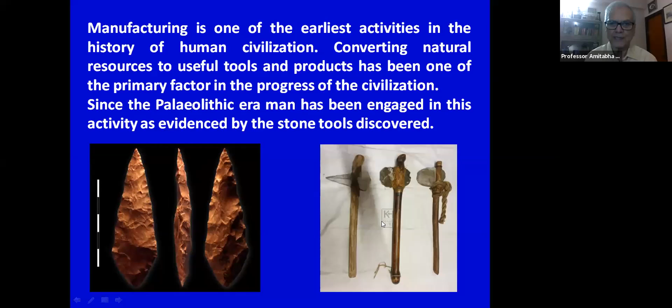Like this. Now, this is a point which I have mentioned briefly, but I should mention in a more elaborate way, that manufacturing is the driving force behind the world economy. You know that long back, 300 or 400 years back, everybody in Europe used to think of coming to India. Now every Indian boy is thinking of going to USA and Europe. Now, this is something which changed.

Why it changed? Because something happened through which, in manufacturing, the West took a lead and we fell behind. Manufacturing is closely linked to the growth of world economy. And the following slides show the two major changes in the world economy in the history of civilization.

Now, such events which trigger a change in shape of the economy growth rate are termed as industrial revolution. And two such major revolutions have been recorded. The first industrial revolution happened with the advent of the first prime movers like steam engine. And the second industrial revolution happened with the emergence of microelectronics and the computer technology.

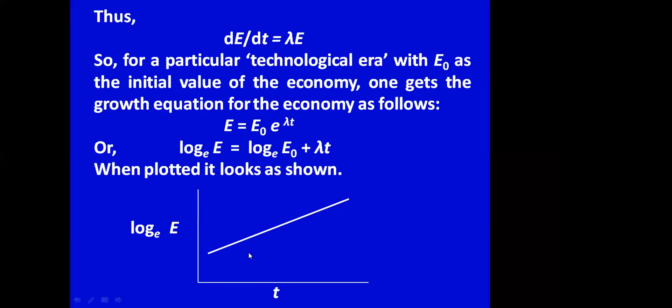So if you plot log E versus t, a semi-log curve, you get a straight line, because log E is proportional to t. Now, what happens? The slope, as I mentioned, depends on the technology, on the level of technology.

If there is a sudden change in technology, what happens? You can see that the growth rate changes. So this change in lambda, this growth rate, happens in a short period of time, something like this. And something happened here, which is called industrial revolution.

So if we plot log E versus t, the straight line will suddenly change slope. And this industrial revolution happened twice. Or, some people say, thrice. So we'll just see how it happened.

Now, once it happened when steam engines were first invented. You can see around the end of the 18th century, this was the yearly pig iron production in England. It was growing like this on the semi-log plot. And then suddenly here, the whole thing changed because of the advent of prime movers. And this is the first industrial revolution which mankind experienced. And since that time, we started becoming a developing nation, and the American and European nations became developed nations.

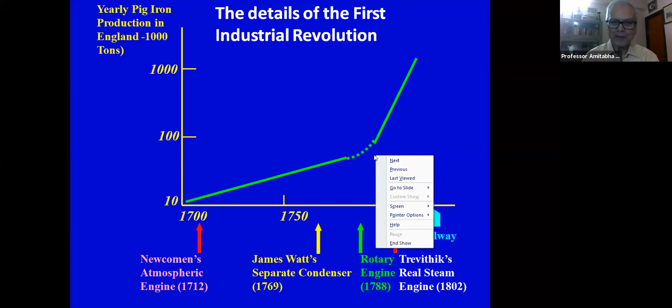But in a major way, the real change came towards the end of the 20th century, around 1970 or so, which is the second industrial revolution. And this happened in our lifetime. The first industrial revolution happened with the development of the first prime mover, that is the steam engine. However, the direct connection of manufacturing with this event should be understood.

Now, why are we doing this in our manufacturing lecture? Is there any connection of manufacturing with the first industrial revolution? This point may not be that well known amongst our students, so I would like to mention it quickly. It was the development of boring technology with improved accuracy that made the James Watt version of the Newcomen engine with condenser function. Although James Watt patented it 10 years back, all attempts to run such an engine failed, till Wilkinson developed the manufacturing technology to produce an accurate cylinder and piston.

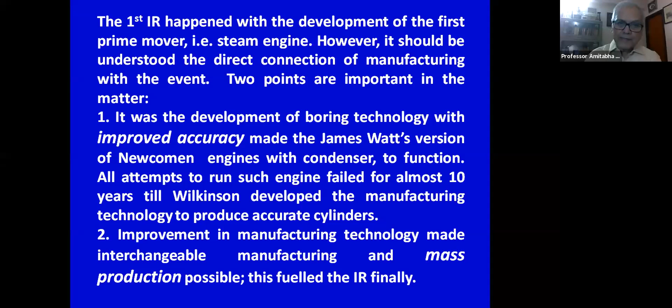Now, this improvement in manufacturing technology made interchangeable manufacturing and mass production possible, which fueled the industrial revolution because it could make industrial products within the capacity of the common man. That means it invaded our domestic components, not only industry. That is a very major change. So it was manufacturing technology which made the steam engine possible. Before that, it was not possible. James Watt had to wait 10 years for Wilkinson's new boring machine, and 2 companies broke because his model was not running. Only after this it happened.

Now I will just tell what they say about how this manufacturing is related to the first industrial revolution. In April 1775, Wilkinson delivered a cylinder; in Boulton's language, Boulton being the financier of James Watt's engine, "it does not err the thickness of an old shilling at any part." Wilkinson improved his technique; in Watt's own language, "a 72-inch cylinder being not farther from absolute truth than the thickness of a new sixpence in the worst part." You will now laugh at this definition of accuracy. The thickness of a coin may be a monstrous error by today's standard, but that helped the engine to run.

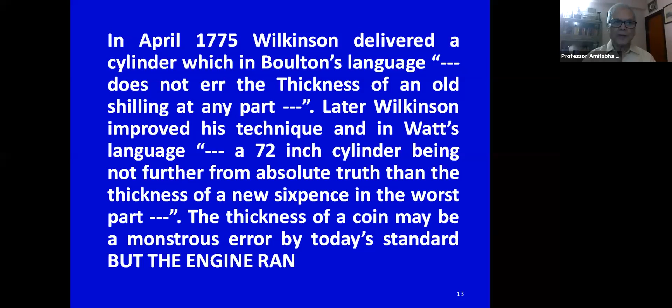So the second industrial revolution happened during the 1970s and 80s of the last century, in most of our lifetime, and we have experienced it, when microelectronics and computer technology developed. In this case also, manufacturing technology.

Excuse me, sir. It seems your speaker is on. Hello? Yeah, Professor Amitabha Ghosh, sir. Yes. Should I proceed? No, we can listen. Ghosh, we can listen comfortably. Yes, sir. Okay. Two voices are coming actually. You have to mute all others. I am not going to interact now because this is an online lecture and it will be difficult to interact at this stage. Kindly keep your questions ready and pass them on to the organizers. I will answer them.

In this case also, manufacturing technology was in the driving seat, as this industrial revolution's prime agent was micro-manufacturing technology that made very large-scale integration possible. The primary help came from photolithography-based micro-manufacturing or micro-machining, which currently can fabricate feature sizes smaller than a small fraction of a micron. That means we have gone to deep submicron level fabrication. However, this technology can only help in two-dimensional miniaturization of a device, and the basic purpose of such miniaturized devices is to manipulate information. That was the primary aim of the second industrial revolution.

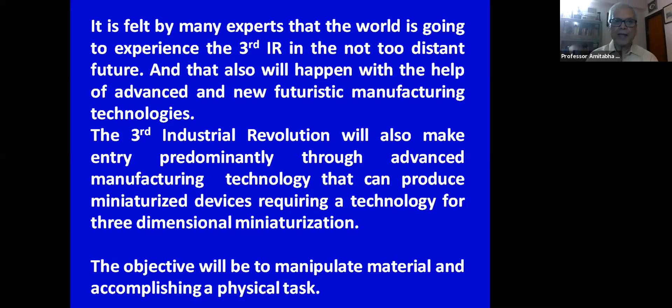This amply makes it clear how the advancement of fabrication technology is linked with the progress in human civilization. The connection is not very clear, but a little deeper study shows us that manufacturing is the key player in this industrial revolution. It is thus important to have at least some idea about such advancement so that our country can develop the right kind of new technological manpower and play a center stage role when the third industrial revolution knocks at our door.

In the previous two cases, the first case we completely missed, the second industrial revolution also missed, but we became only the user or a follower. We should not let that happen in the third industrial revolution. We should also be at the center stage.

With this introductory note, a brief discussion of the advances in manufacturing technology and the futuristic issues can be taken up. So far, I have discussed just the background of why we should consider manufacturing technology an important point and what we should discuss. That's why we are saying that the trend of development, what will be in the future, is very important for us to see. So now what I will present is a general discussion on manufacturing processes.

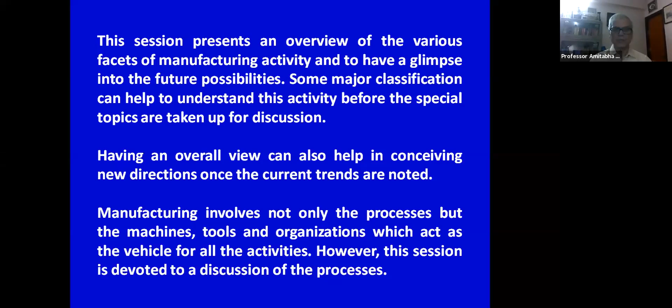Now, manufacturing involves not only the processes, as it has been mentioned by the Honorable Chairman of the Board of Governors. There are so many things: material handling, management, marketing, everything is in manufacturing. But I think in this particular short course, we will emphasize the processes, because the machines, tools, and organizations which act as the vehicle for all activities, our manufacturing processes play the main role. So this session is devoted to a discussion on the processes, an overview of the manufacturing processes.

So first we will divide or classify all manufacturing processes into two basic classes. You are all familiar, there is nothing new in this. One type of manufacturing we call bulk processes, which is material transformation and bulk handling of raw materials, ores, all kinds of things, chemical industries. And the others are called unit processes, where we produce individual pieces. Here it is again material transformation plus manipulation. So you can see the primary difference is one is bulk handling, the other is individual manipulation.

Now after this, I think we should concentrate more on the unit processes in this session. So what are unit processes? It is material transformation and manipulation to impart the desired shape, size, quality, and finish to our product. It will require manipulation and control of the fabrication processes, and then it will go to testing and inspection, and finally marketing, etc. And the whole thing is called manufacturing.

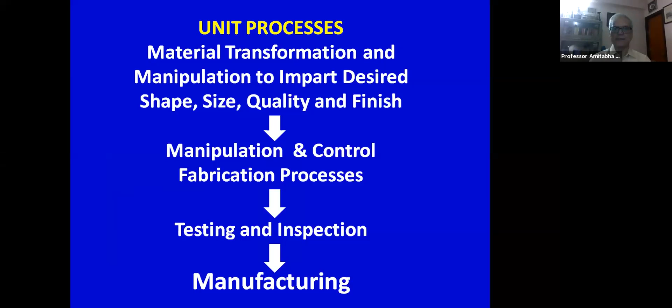So now when considering manufacturing processes, this can again be classified into two major groups, depending on the basic approach for shape generation as indicated below.

This particular point may not be known to all, but it is a very important thing if you have to discuss futuristic issues. Now, this classification has one set of manufacturing processes that follow a top-down approach, another set that follows the bottom-up approach.

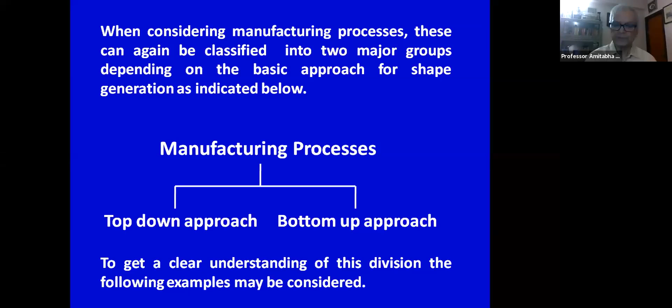What are these? Top-down approach is where we take a particular piece of metal and shape the material to achieve the required shape, size, accuracy, finish, and properties. A very large number of machines, types, and methods of shaping have been developed.

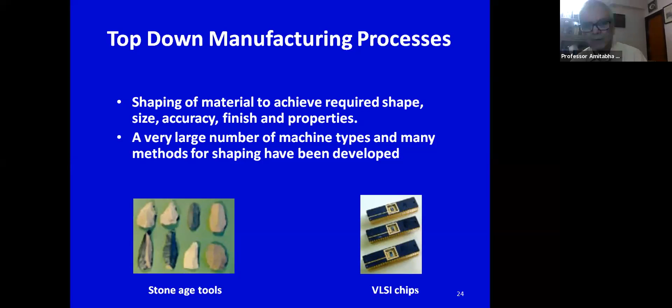That means you take a piece of metal or material and give it shape, either by removing the excess material, which we call machining, or by compressing it to give a form, which we call forging, or by melting it and putting it in a mold to give the shape, which we call casting.

In VLSI chips also it is the same thing. Here you are giving the shape by removing the excess material, of course at a very deep submicron level, through photolithography. But basically the approach is the same, and these are all top-down manufacturing processes. For your information, the majority of processes like turning, all machining operations, forming operations, sheet forming - all these are basically top-down manufacturing processes.

One very interesting example in India we have, a unique example of top-down manufacturing, is this. I think many of you have visited this. You can recognize this - this is the Kailash temple in Ellora. Now you see, it is something unbelievable.

You can see these are human beings, so you can realize the size of this. It is almost equivalent to a 10-story high building. And everything - all small figurines, windows, doors, all curtains, the whole complex - you can see there inside you have houses for shramanas and others. It is an extremely complicated and huge complex, equivalent to a 10-story building complex.

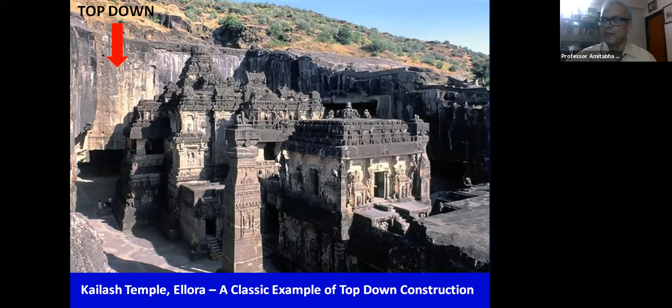Now, in case of the bottom-up approach, the situation is very different. Here, the required shape, size, etc., are produced by adding material gradually.

So how does this happen? The first bottom-up approach procedures used to be called, in those days, rapid prototyping. Now, of course, they are called generative manufacturing. First, a CAD model is produced. Then this CAD model is computationally sliced, making each layer a thin layer of the required shape and size. And finally, these are actually generated.

There are various methods of generating, I will not discuss that. Stereolithography was the first thing done using laser beams. This way you generate one by one and get the final shape. This is the STL method, the stereolithography method, which we had. Now, of course, there are many other methods.

Now, this is a completely different approach. You don't take a piece of metal and produce the right shape. Here you add materials in small quantities, either in the form of a plane, a point, or a line - all are possible.

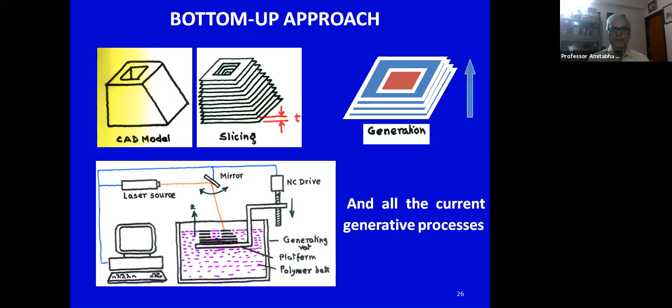Now, another famous example of the bottom-up approach is the pyramids. You know very well how pyramids are formed - small pieces, billions of such small pieces of stone, were added to make this huge structure, which is almost 50 or 60 stories high.

So therefore, we can divide manufacturing processes into two different groups - one is bottom-up, the other is top-down approach. The old processes which we have been using so far are actually top-down, except in a few cases. But in future, you will find the bottom-up approach is going to play a very major role in our system.

Now, with the progress of science and technology, newer horizons are opening up, increasing the process capabilities of various top-down and bottom-up manufacturing processes. Initially, top-down processes used to make things of big size, macroscopic or mesoscopic size, maybe some meters to millimeters to centimeters and so on. The bottom-up approach, similarly, used to start from the molecular level, the chemical processes.

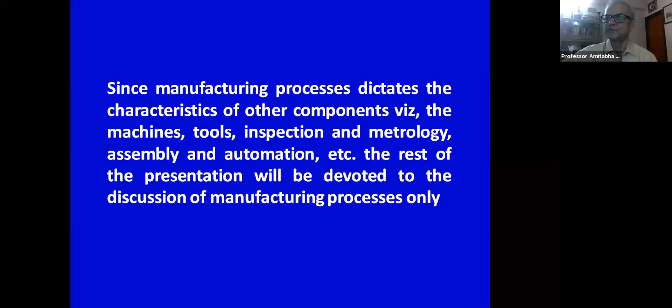Manufacturing processes dictate the characteristics of other components: the machines, tools, inspection and metrology, assembly and automation. The rest of the presentation will be devoted to the discussion of manufacturing processes only. So now we'll discuss manufacturing processes: what is the general whole scenario and the whole family of manufacturing processes, the types and classification. We will attempt that now.

The more detailed classification of existing manufacturing processes can be understood by considering the following basic aspects: what type of energy is being used for a process, what is the mechanics of material removal involved, what is the energy source we are utilizing, and what kind of manipulation and control is used. These are the points we should keep in mind, and on this basis we can classify the existing manufacturing processes.

So if you see the energy type, you have mechanical energy, electrochemical energy, chemical energy, and thermal energy. You can recognize that various manufacturing processes today can basically be classified by energy type. Mechanical is the pure machining processes, electrochemical is electrochemical machining etc., chemical is chemical milling, and thermal is various types of thermal processes like laser-based processes where you use thermal energy, or welding, etc.

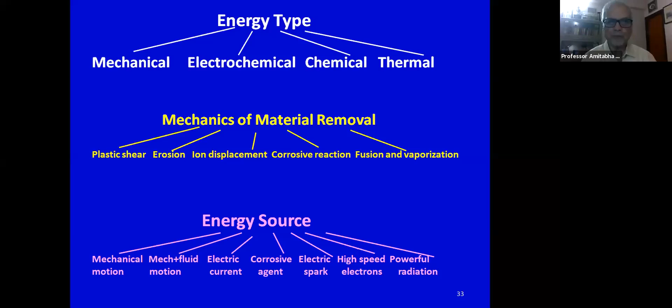The manufacturing processes for shaping are material conservation processes, where you maintain the amount of material you take and give shape to the same volume of material, which includes casting, forming, and powder metallurgy. Material removal processes are where you remove the excess material to give the required shape and size; this includes conventional machining, unconventional machining, and micro machining. Unconventional machining can again be mechanical, electrochemical, chemical, and thermal.

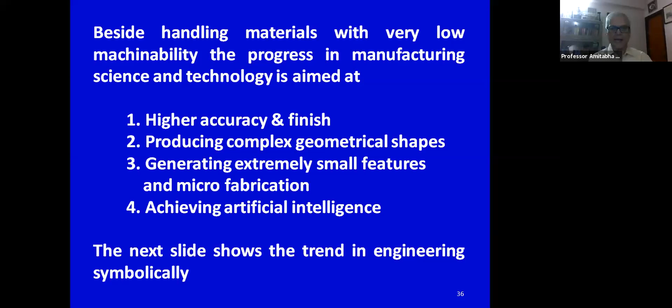Gradually we are going towards much smaller machines, imitating nature, which is nothing but molecular motors. All these protein motors are continuously functioning in our bodies, and we are not aware of it. It's a very interesting thing. Those familiar with bioscience are definitely aware of ATP synthase and such things. I'll discuss this a little later.

The other development is the Mars Land Rover. It is quite autonomous and intelligent because when it is moving and faces some crevasse, it should immediately decide what should be done, whether a brake should be applied. It cannot send that image to Earth station and wait for guidance, because by the time the command comes, a few minutes have passed and the damage has been done. The futuristic autonomous humanoid robots we are aiming at are currently part of science fiction, but you never know what will happen in a few decades.

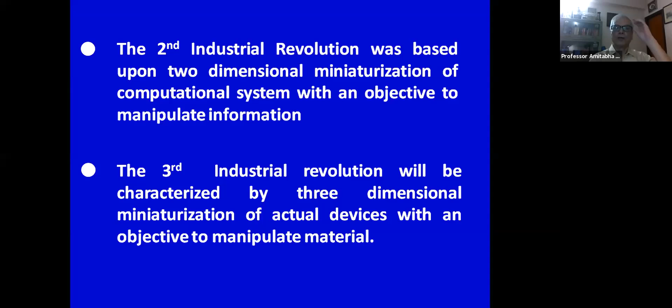As I mentioned, the third industrial revolution will be characterized by three-dimensional miniaturization. Earlier, we were making only the electronic circuits miniaturized. That means it is a two-dimensional miniaturization. But now, you will miniaturize the whole machine. Like a robot, you will miniaturize it to micron level so that it can be injected inside your brain for a particular type of task. So this is going to be the real issue in the future. So now I will devote some time to discussion on miniaturization and microfabrication, because that will be a major objective of our futuristic manufacturing processes.

As I mentioned once, let us come back to that. Why miniaturize? The capability enhancement through large-scale integration, economic reasons, which I also have elaborated, that miniaturization can make things cheaper and you can afford it, and accomplishment of special high precision tasks and approaching intelligence. Now you see, if you want to make an intelligent robot, suppose its robotic hands. Nowadays, we put a few strain gauges in its 3 fingers and we expect the hand to be an intelligent hand. It is nothing like that.

For a hand to develop a tactile image formation ability, that is when you grasp something, you form a tactile image so that you can feel what it is, that requires what? You have thousands of sensors in your palm. So therefore, intelligence will require a huge amount of sensory information. That means a huge number of sensors to be packed in a very small area. So how can you put a few thousand sensors in just a few square centimeter area unless you miniaturize it? Intelligence can be achieved only when you have a huge amount of information, and that means a huge amount of sensory devices, possible only if you make them miniaturized and pack them in a small area. So intelligence cannot be achieved unless you go for miniaturization. And a few other things which I have already mentioned.

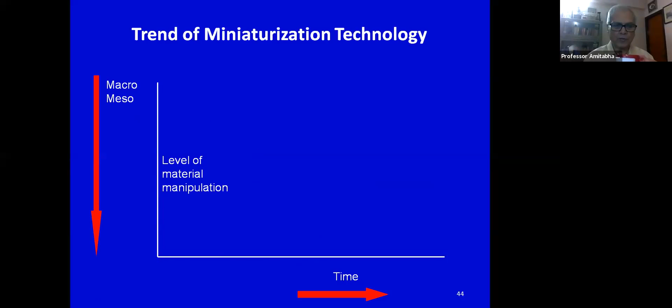Now, how is our miniaturization technology progressing? What is the trend? Let us see. Here is the level of material manipulation, and this is with time: how much material we can manipulate, what kind of miniaturization is possible, and the years how it is progressing. So now you see, with the traditional processes, the level of material manipulation was macroscopic. And then you go to micro, our current micro and RP technology, rapid prototyping technology, around 2000.

Then you go to nano level, which we are now talking so much about, nanotechnology, etc. Material manipulation is at nano level. Nano level means you understand the fraction of, or 10 angstroms is 1 nanometer, I believe. So when you go to manipulation of that level, we call it nanotechnology, which we are now more or less capable of handling.

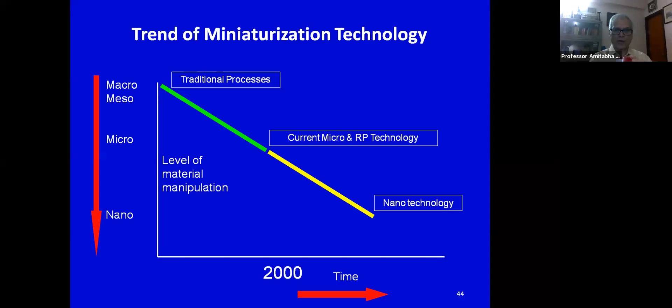And now I think we are going towards atomic level. So our ultimate goal is that we should be able to manipulate material atom by atom, at atomic level. That, of course, we have still not achieved, but we are going to achieve it very soon, as it appears from the trend. And what are the technologies for these things? You can see the range of current microfabrication technology.

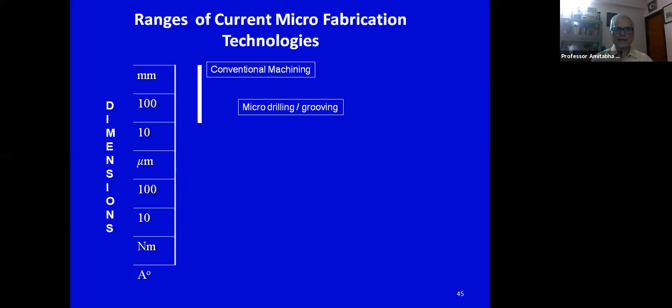Conventional machining is in millimeter level. It can go to 100 micron level. Then micro drilling, grooving, etc. goes to 100 micron level. Then we have optical lithography, which you are familiar with, which can go to micron level and submicron level, 100 nanometer, 10 nanometer, and so on. This is all you can achieve by optical lithography.

Then diamond surface micro machining can go to nano level, in a restricted sense. Then we go to X-ray lithography, which has a range of micron to angstrom. And finally, we go to deposition technology, with which you can go to atomic level. So these are the current microfabrication technologies of various types, with their different size range capabilities.

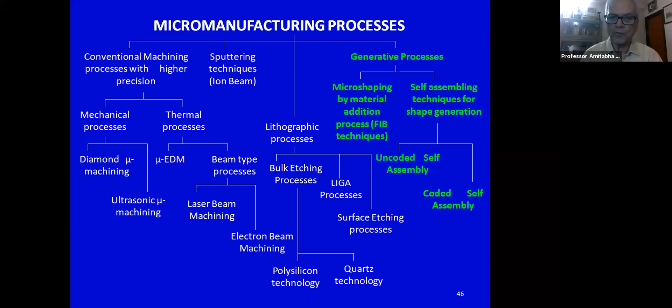Now, the next slide will show you the major changes in the engineering activities. This includes the changes in the design concepts, information flow during fabrication, level of intelligence during operation, and the energy currency involved. So in design, what is the current trend of change? Currently we have machines and devices which have many components. But when you go to micro and nano level, the machines and devices will be monolithic. You cannot have a micron level mechanism or device in different components and assemble them.

So therefore, what will happen? All micro-sized machines and devices will be one piece, but they will have the capability to have relative motion, etc. But that's a different issue; we will not go into that now. Second, the change in design concept is miniaturization, which I have been emphasizing. Next will be massive parallelism. This is a word I should explain.

What is massive parallelism? If you just check any muscle of any animal or even your own muscle, you will find it is a bundle of a huge number of micro thin threads or proteins. Why is it so? Why is it not one thick block of protein? This massive parallelism does two things. One is when you want to have information, just one piece of information will not make it intelligent. You must have hundreds, thousands, even millions sometimes, and it must feed the whole system in a parallel way, simultaneously. That is one aspect of massive parallelism.

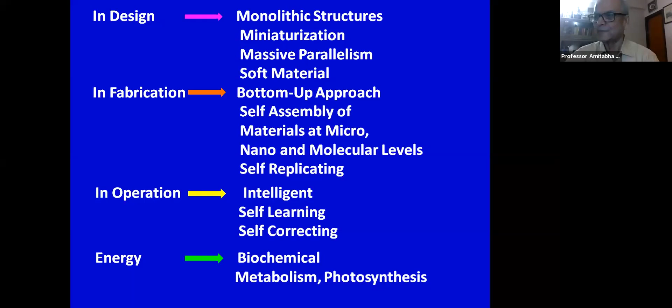So therefore, what we have seen, the top-down approach for shape generation at the micro level is restricted to two-dimensional or quasi-two-dimensional features, but producing three-dimensional objects and devices by machining is not possible except for some very simple cases. How do you make three-dimensional objects? So for this, you will find that we have to imitate nature.

Consider yourself. You grew in your mother's womb from one cell to now a few trillion cells. Into such a complex shape, such a complex system, how has it happened? Nobody has done it from outside, nobody has taken one piece of protein to another piece of protein. It has all naturally self-assembled, a self-generation system by a bottom-up approach.

Now, nowadays, as you know, engineers are taking a lot of lessons from nature, because nature is the best teacher. Now more or less people are convinced. So in every aspect of engineering, whether it is design, operation, or fabrication, we are trying to imitate nature.

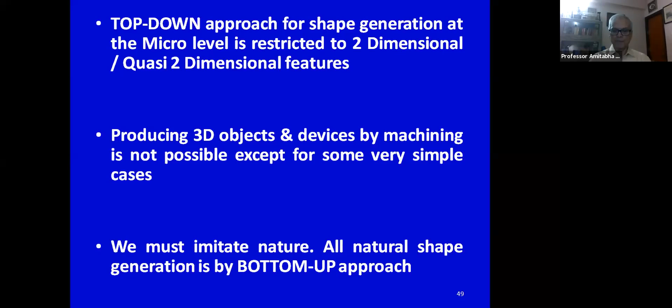So it is now more or less sure that to get the third industrial revolution realized, we have to depend on a bottom-up approach. That means very complex shapes, multi-material shapes, will be generated by a bottom-up approach, adding material in small elements, small building blocks, to generate a huge structure. But it has a difficulty. The bottom-up approach involves an enormous number of manipulations of material elements.

But you are so big, anybody, like any of us, our dimensions are meters. How are you growing in a time frame of 9 months only? Now this is impossible unless you go for a major change, that is self-assembly. That means material will be assembling itself without the intervention of somebody from outside. Therefore, the only practical solution is through self-assembly of material, as happens in nature.

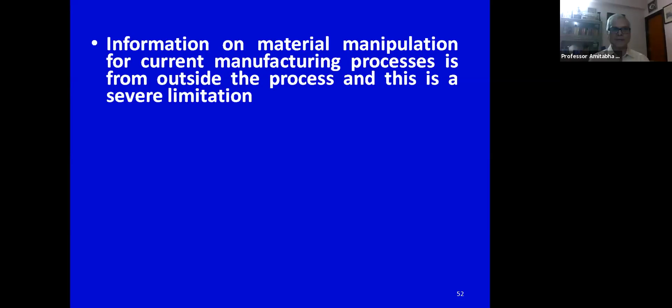So in this, what is going to happen? The information on the material manipulation for current manufacturing processes is from outside, like a program or some kind of tool, or sometimes a drawing on a drawing board in the old times. So this is a severe limitation. Thus you must achieve shape generation by self-assembly of material without any intervention from outside the process.

It should be self-assembly. All information regarding shape, size, etc. should be contained within the process itself. So therefore, the most important thing, or major revolutionary change in manufacturing, is going to come. It may not be now immediately, but in future, the self-assembly of material. It's a paradigm shift in fabrication technology.

But remember, not that everything will be assembled in a self-assembly way. Like a locomotive engine will not be self-assembled. Like say for example now, VLSI is not necessary for your locomotive engine or an aeroplane, but it is having an extremely important role to play even in the macroscopic size things which are produced conventionally. So self-assembly of material will be necessary not only to make the micro-sized devices in future, but even for macro-sized objects.

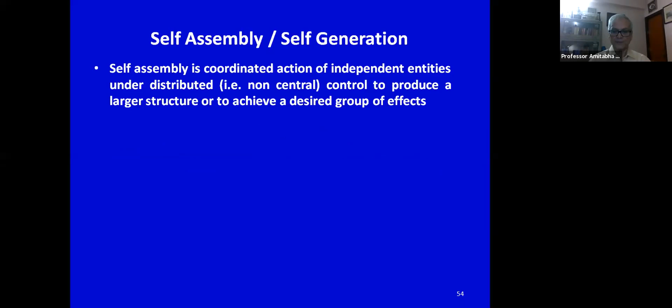Now, what is self-assembly and self-generation? Self-assembly is coordinated action of independent entities under distributed, that is non-central, control to produce a larger structure or to achieve a desired group of effects. Self-assembly or self-generation is a process in which components, either separate or linked, spontaneously form ordered aggregates. It can occur with elements having sizes from molecular to even macroscopic sizes.

Now, as I mentioned earlier, manufacturing by self-assembly can be of two types. One is uncoded self-assembly, which I'll show you in the next few slides: minimization of potential energy. Why will it assemble? Because that assembly will cause the total energy to become lower and lower, and the natural process will always aim at lowering the energy. Whereas in coded self-assembly, there will be instructions about the shape and the way it should assemble, which is a more complicated thing.

They call it either coded self-assembly or programmed self-assembly. Like we all have generated: I have not become a goat, I have not become a tree, I have become a human being of a definite type, only because in the DNA all the information is coded, and that helps the self-assembly to take a definite direction.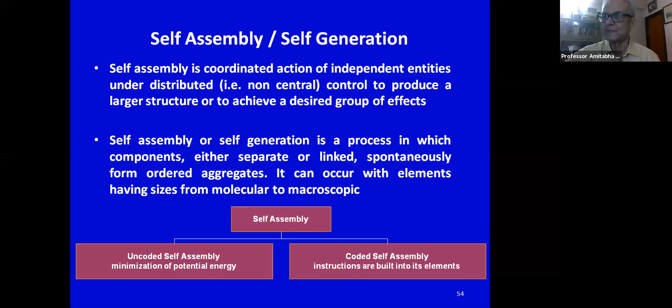So there will be some basic requirements for self-assembly and generation. Components: elements should be groups of molecules or segments of a macromolecule that interact with one another. They may be the same or different. Their interaction leads from a less ordered state to a more ordered state. I'll show some examples later. Interaction: components need to interact. Definitely they must come together. And the interaction can often be selected and tailored by definite shape, particularly in case of mesoscopic or macroscopic objects.

Reversibility or adjustability. That is, when two components come together, they should be able to adjust positions once in contact so that the minimization of energy is possible. Environment: self-assembly normally takes place in a solution or at an interface which allows the required motions of components. They are generally in a liquid and they have thermal agitation. Mobility: the components need to be mobile so that they can come together. Equilibration: equilibrium is required to reach the ordered structure.

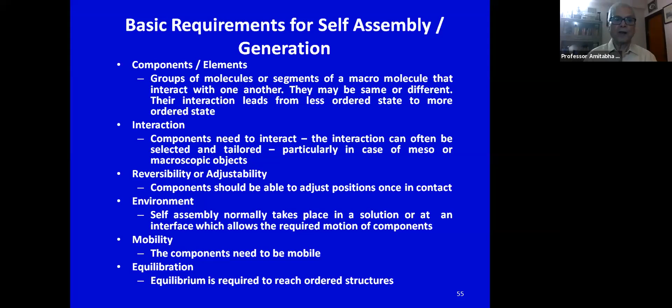Now, at the root of the self-assembly process lies the minimization of surface energy. The currently available self-assembly processes depend on the surface characteristics of the basic elements. Primarily, two types of surfaces are engineered now. One type is called hydrophilic, which means they love water or prefer contact with water. The other type of surfaces are called hydrophobic, which means they avoid water. These surfactants, etc., maybe the chemical engineers are very familiar with. So the assembly always attempts to minimize the area of the hydrophobic surfaces in contact with water.

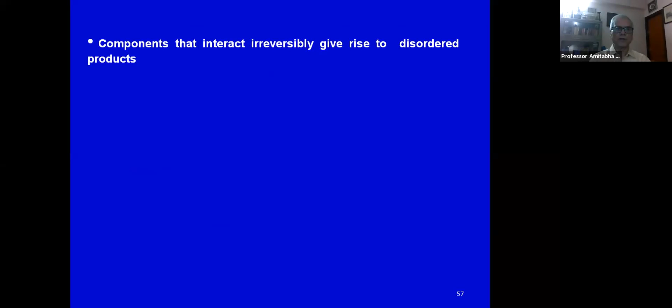So when you put a large number of elements in water and they have hydrophobic surfaces, there will be a natural tendency for them to come together so that ultimately the total surface area exposed to water is minimum. The next slide will show a very simple elementary example of how it happens. Say components interact irreversibly, meaning once they come and get attached, they cannot adjust. So they produce disordered products. Say this is a basic element, another one comes, touches it and gets attached. Another one comes and gets attached. So this way you generate a disordered thing.

However, when they can adjust position, and that's why I said that ultimately all such material will be soft material, because their attachment will not be that firm, then they can adjust and minimize the energy like this. Suppose this is the basic element, another element comes, they get attached, but then the total area here is more, so it will minimize the total area in contact. So this way another one comes, and finally, an ordered structure, a definite shape.

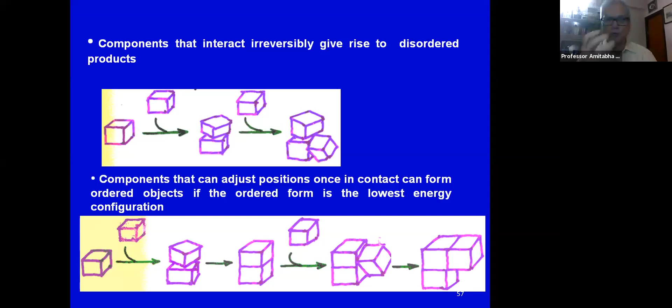Long back, I was in Kanpur, one of my students was working on this through simulation. Interestingly, I found I could generate a large number of shapes of different types of viruses. If you do computer simulation, you will find the shapes you are generating are very similar to the commonly found viruses, including the coronavirus.

At the molecular level, the molecule we have has one side as a hydrophilic functional group, the other side hydrophobic carbon chain. If you put millions of such molecules on water, they will automatically adjust their position so that all the hydrophobic carbon chains are away from the water and all the hydrophilic ends come into the water. You don't have to do anything. Even with billions of such molecules, this ordered state occurs in a fraction of a second, without any manipulation from outside.

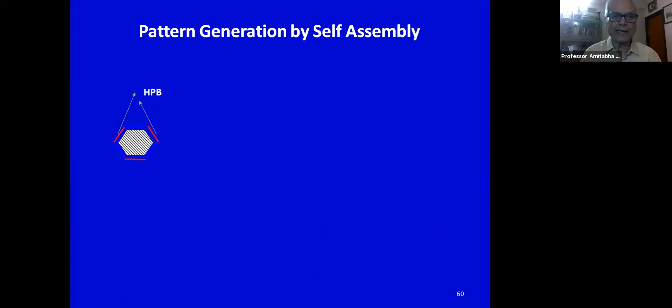Suppose you change the shape slightly, a hexagonal basic element where alternate sides are hydrophobic and alternate sides are hydrophilic. If you put them, what happens? Automatically, the hydrophobic ends come in contact, and that way energy is minimized. Another possibility, if you go this way.

Whereas if all the surfaces are hydrophobic, the connections will gradually develop like that, minimizing the total surface area. Here it is a line, and the circumference will be minimum. This way, by designing your basic element and its characteristics, you can produce different kinds of shapes by self-assembly. You don't have to do anything.

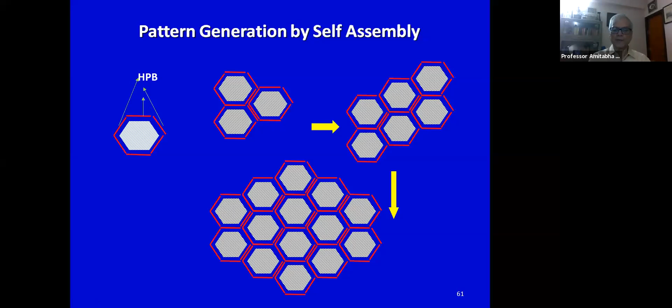That's what nature does, but of course in a far more complex way. Here are other examples: if you have basic elements like this triangle, they will not combine like this, they will combine like this instead, because the total area exposed to the surface would be more otherwise. If they are rectangular or square, they will combine like this, not like this.

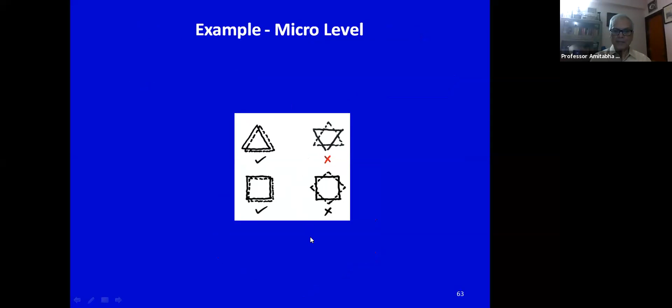Then this will be multi-stage. Multi-stage self-assembly means first you produce smaller objects, and these smaller sub-assemblies then go to major assemblies, and finally the whole object is produced.

So these are all binary surfactant systems. These are used in chemistry nowadays, but mechanical engineers are gradually coming in this direction, and manufacturing is gradually becoming aware how to use this multi-stage self-assembly system to produce things. But we are still far away from developing a machine, you know.

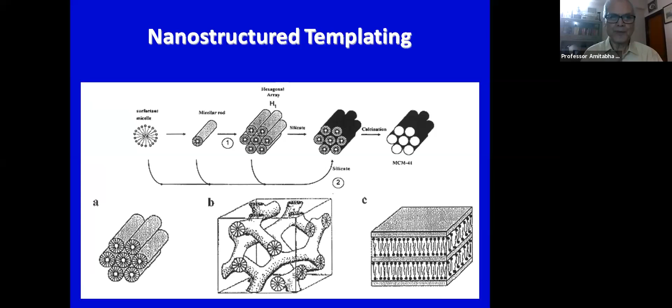These are the self-assembled materials. So many experts believe that the world is heading towards another industrial revolution, the third industrial revolution I have been telling you about. The primary indicator for this is the glimpse of a paradigm shift in science and technology, represented by the frequent merger of engineering science with life science. I think our engineering and life science will have a lot of interaction. Actually, that's why long back, 20 years ago, in IIT Kharagpur, life science was made a compulsory core course at the first year level. Engineers must be familiar with life science, because in the future, they will be facing many things which are actually dependent on nature and life science.

A new area of R&D has started raising its head, called synthetic biology. Synthetic biology means the machines and devices developed will be artificially made, but they will have many features and characteristics of living entities. Self-assembly offers a possible route to the fabrication of three-dimensional microstructures and machines, and a number of problems in manufacturing, including problems in robotic assembly, may be eliminated by self-assembly.

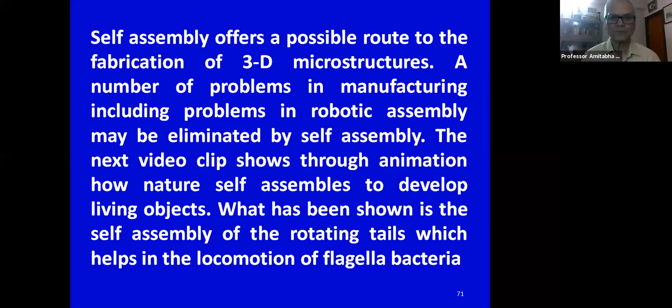No, video is not working.

Fundamental changes in the philosophy of designing the systems and devices of the new era are indicated in the next slide. At present, the material body, sensing devices, and actuators that cause movements are all separate entities. But in future, just like our living objects, the actuators, sensors, and body will all be merged into one, a material body with integrated and distributed sensing and actuation. That will be our future machines.

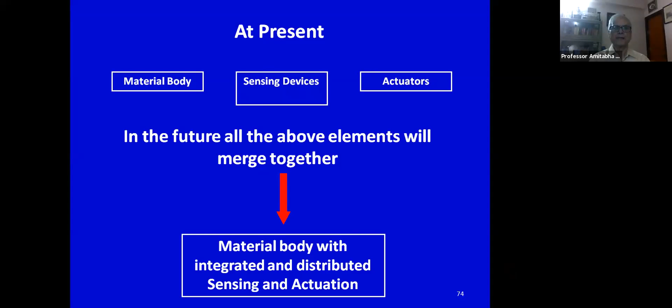There is a strong possibility that the energy source for functioning of a device will be biochemical, that is hydrolysis of adenosine triphosphate. It may also be possible that in the distant future, many devices and systems will use photosynthesis as the source of energy, just like our trees. Thus the sun will be the main source of energy, and the machines will produce oxygen instead of carbon dioxide. Can you imagine its impact on our world climate?

These are protein lobes. What happens is that adenosine triphosphate, our ATP, through hydrolysis is converted into ADP and phosphate, and also some free energy which we use for all our activities. We consume almost 25 kg of ATP every day, so you have to reproduce that ATP. The ADP that comes out, along with phosphate, is again combined by these machines called ATP synthase.

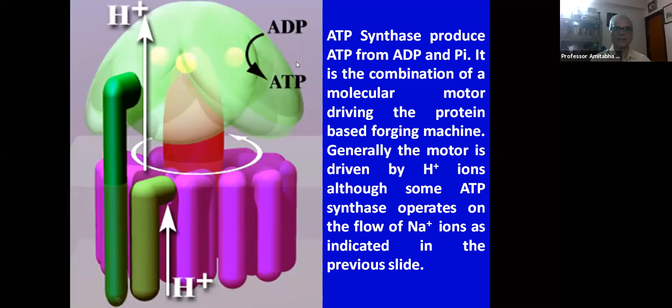This motor rotates at every stage by 120 degrees, and this lobe takes the adenosine diphosphate and phosphate, making adenosine triphosphate, which goes out and is used again. So this machine, at the molecular level, is just like a very sophisticated electrical motor, but here it all runs by electrostatic phenomena, because this is ion movement, and that electrostatic phenomena is the real thing by which it happens.

Now the nature of the progress in manufacturing in the future is depicted in the next slide in a very similar way. Of course, we have very high ambitions to imitate nature. It will take many, many decades before we can go somewhere near that. But the direction in which we are going, as an engineer who will face the challenges of the future, can be represented by this composite diagram.

Now, in traditional processes, we know that material exists independently of the shape - there is a material, and we have to give the shape to it. Generally all the components and objects are of a single material, like copper, aluminum, or something like that. Next will be material addition or removal at the macroscopic or mesoscopic level, like most machining and other processes, where material addition or removal is taking place at the macroscopic or mesoscopic level in the present.

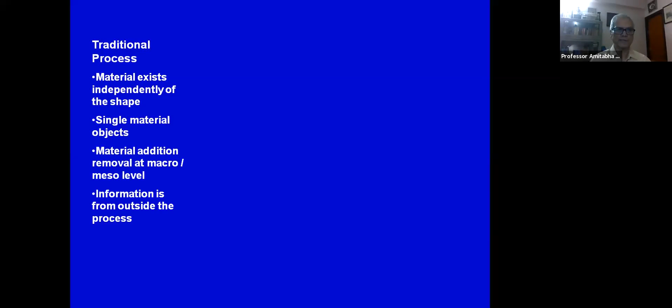Assembly can be eliminated in some limited cases. That means some sub-assemblies can be eliminated and you can produce something as a sub-assembly. Already we are producing through generative process objects where relative movement is possible - multi-component devices, as you all know.

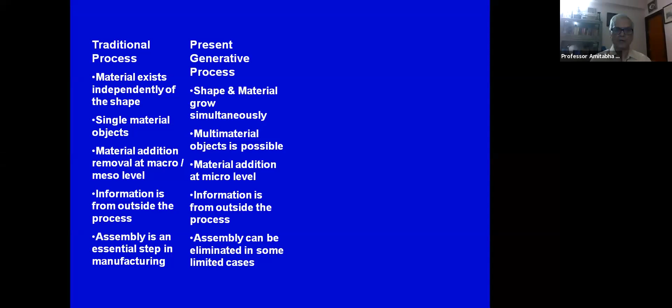Now the future generative process which we are aiming at, maybe another decade or so, shape and material will grow simultaneously. Multi-material objects will be very common. Material addition will be at the nano or molecular level, and information will be partially in the process, partially from outside.

That means sub-assemblies will have inside material information, and the overall assembly, when it has to be done, has to be from outside. Most often, sub-assembly will be eliminated - that will be by generative process. And the final, ultimate self-generative process will be self-generative, self-controlled, lifelike biological growth.

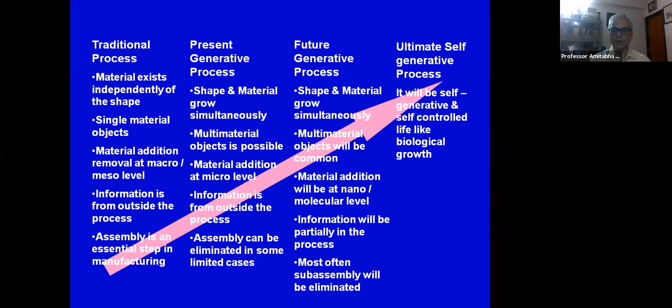So the various disciplines of engineering and technology are also undergoing continuous transformations. The major science and technological institutions of India must also keep abreast with these changes and redesign the various curricula. Only then will our country be able to face the challenges of the impending third industrial revolution.

And India will not be compelled to be a silent bystander. The progress of engineering disciplines is depicted in the following few slides in a symbolic fashion. Only with such progress can synthetic biology be achieved.

Now you see the traditional versus what the future engineering subjects will be. We have the current traditional engineering subjects. Physics will be a main input, chemistry will be a main input, mathematics and computation for extensive simulation and modeling will be an extremely important part for futuristic engineering, and life science will also be an integral part of engineering. That will give our future engineering curricula of the new era.

The basic nature of futuristic engineering can be represented by the diagram shown here. What will be the nature of futuristic engineering? The primary component will be miniaturization as one aspect. Massive parallelism will be another aspect to make things intelligent. Then bottom-up approach and fabrication, and self-assembly mass manufacturing will be necessary.

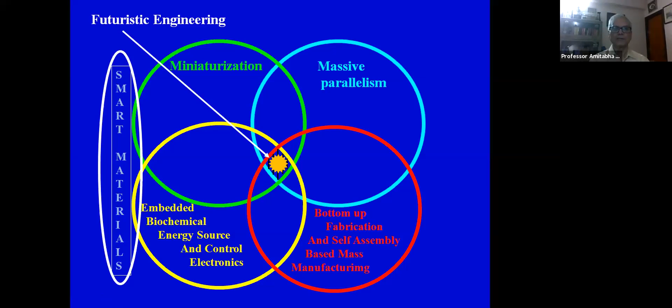Embedded biochemical energy source and control electronics will be another very important aspect, and overall we will use smart materials. So a combination of all these things is actually what we have to aim at in futuristic engineering. Any further discussion of the subject is, of course, beyond the scope of this presentation.

It will be only a very bird's eye view of what we may expect or in which direction we are moving. At times maybe it will change a little bit, because to forecast technology is very difficult. Even in the 80s there was not even in science fiction a thing like a mobile phone or internet. But within a couple of decades they have become part and parcel of daily life of the common man. So it is very difficult to predict exactly what the technology will be, but we can have some idea of which direction we should be prepared for.

It has been attempted to provide a glimpse of the expected paradigm changes in science and technology, leading to the third industrial revolution, with manufacturing technology playing a very major role. That you have to keep in mind.

The third industrial revolution will change society to a level even beyond the imagination of science fiction writers. As I mentioned just now, even in the 80s, science fiction writers could not dream of anything like the internet or mobile phone. It may not happen tomorrow, but India should take initial preparatory actions so that we do not again miss the center stage role when the world faces the onslaught of the third industrial revolution.

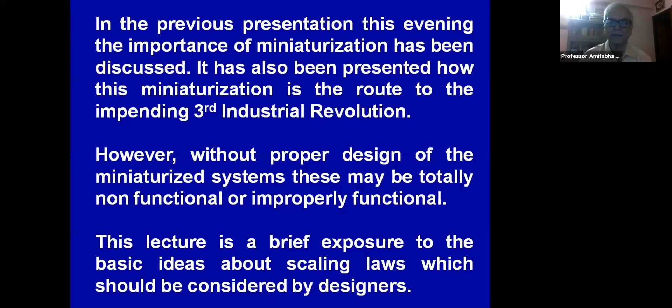It must be remembered that designing miniaturized systems cannot be done successfully depending on our common engineering sense based upon our experiences with the usual surroundings. The performance of miniaturized devices and systems will be successful only when scaling laws are taken into account.

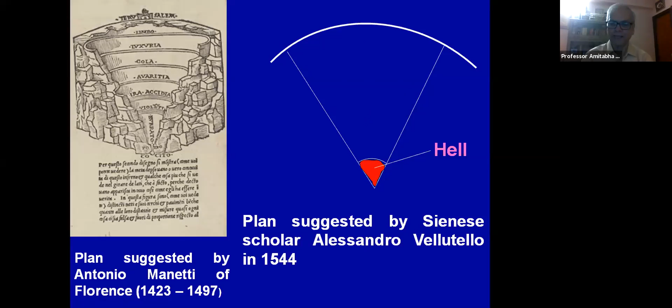So there was a big debate, and Galileo took this point. He knew very well that he had to establish the Florentine model to get the job, because then people will be happy that yes, we are correct. Now in his characteristic style, Galileo first praised the opponent's logic, that the shell of the earth covering the hell would be too thin to support itself without collapsing.

But then Galileo came to his point, giving the example of the Brunelleschi Dome. Those of you who have gone to Florence have seen the famous Florentine Cathedral, and famous is the Brunelleschi Dome, which has no problem supporting itself, and this established the correctness of the Florentine philosopher's proposed model. The audience and the Grand Duke were happy, and Galileo got the job.

You can see this is the Brunelleschi Dome of the Florentine Cathedral, and the design is like this. Here you can see it is a thin shell, and Galileo said that if this can support itself, why not the cover of the hell?

But much later, when he migrated to Padua and Venice, he was given responsibility there, because Venice, being a maritime civilization, depended on ships. While examining the shipbuilding industry, he realized his blunder. He observed that ship models were strong, but the full-size ships often broke when out of water under their self-weight.

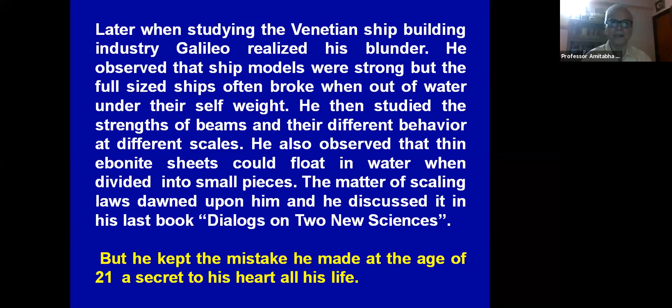Then he studied animals and found that big animals had disproportionately thicker bones compared to smaller animals. He studied a lot of things on this subject, and this subject grew. Now you see, our intuition is based on our experience with the surrounding environment and is conditioned by the sizes we see or feel with our common sensory perceptions.

As size or scale changes, different physical phenomena change in their relative predominance, which I will show you with some examples. As a result, system component characteristics also change differently with size. These changes can be predicted with the help of scaling laws, and system design can be accomplished when the size changes significantly.

So for example, at some size, physical phenomena A and B will be predominant. When you scale it down to this size, maybe physical phenomena C and D will be predominant. When you further scale it down, physical phenomena E and F are predominant. So different attributes scale differently in their relative importance. The configuration of the system may look very different at different scales, which I will show you later.

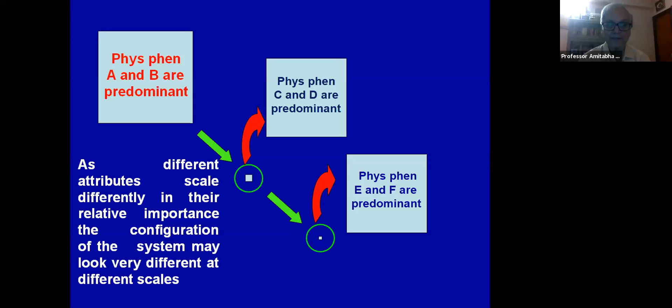What can be inferred from the performance of an existing system about that of a system of similar configuration but scaled down to a much smaller size? The answer to this question is provided by the scaling laws, and thus these laws play a very important role in designing microsystems. The performances of different subsystems scale differently. Actuator performance can scale in a completely different way from structural strength, for example. Thus, the configuration or even the look of a system can be very different at a different scale.

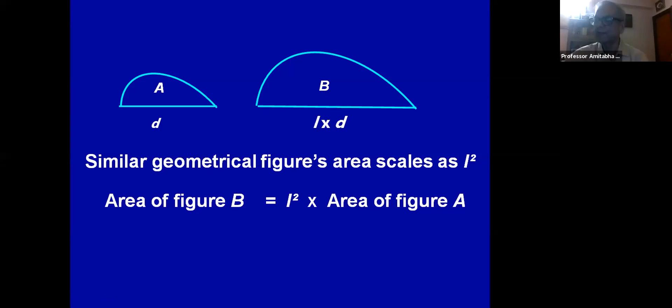Now these triangles are similar, hence the areas will scale as the square of their respective hypotenuses. So as area of ABD plus area of BCD is equal to area of ABC, we get y square plus z square equal to x square. Pythagoras theorem. Very simple. There is nothing new to you, but I think we can extend it.

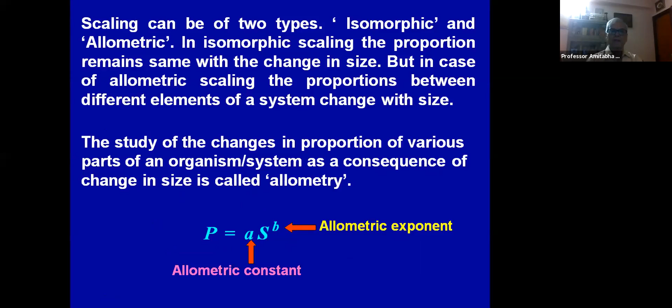So P is a parameter, this is a constant, S is the scale, and B is the allometric exponent. This is the general rule for scaling, as you will see in the next few slides. Now, for example, isomorphic: suppose a spherical water tank supported by a column. In isomorphic scaling up, it will look like this. But if it is scaled up allometrically, you will find the column looks disproportionately thicker.

Now, if you go to nature, you will find that happens. This is because of the scaling laws. Why? Because the weight which acts on this scales as L to the power 3, whereas the area supporting it scales as L to the power 2. So when size increases, the weight increases faster than the area which it can support. So therefore, area has to increase at a faster rate, or the diameter has to increase at a faster rate than the diameter of this. So it will look disproportionately thicker. That is allometric scaling.

Now, various types of forces. The whole matter I'm discussing here ultimately leads to the design of microsystems. So you have to keep in mind that while you are designing a microsystem, your scaling laws are important, and without taking proper care of the scaling laws, your design may be imperfect and may not function.

Mechanical systems are subjected to various types of forces during operation. Some are the motive forces supplied by the actuators to make the machine or the device work. Some are developed as resistance to the movements of the system. Common types of forces which you will encounter: one is surface tension, which scales as L to the power 1, because it is the perimeter length which is important, because surface tension acts on the perimeter. Electrostatic force or fluid pressure force scales as L to the power 2. Inertia force, electromagnetic force, weight, etc., they all scale as L to the power 3.

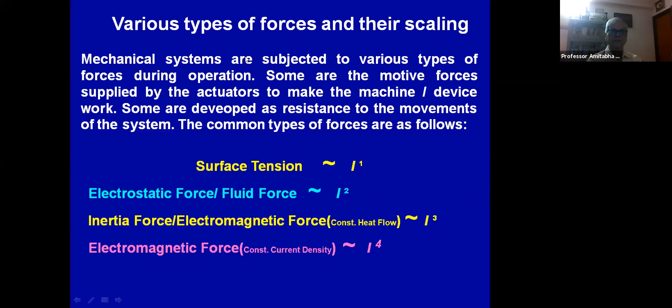Now its effect is very clear from our daily experience also. For example, let us take this case. Different phenomena can be observed with changing scales, though the physical laws remain unchanged. Say, if you have some water in a capillary tube and you invert it, keeping the open end of the capillary tube downwards, water will not come down, which is very commonly seen. You really have to jerk it. Whereas if you take a glass of water and invert it, the whole water will flow.

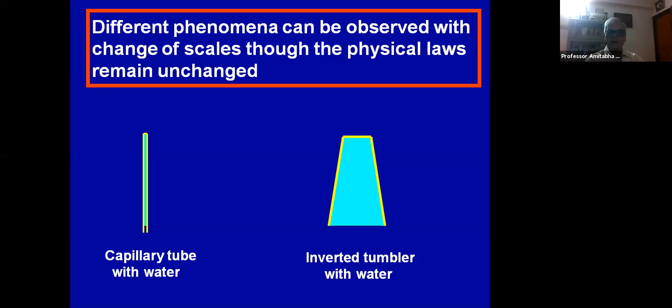Why? The simple reason is that the water is facing two forces. One is the gravitational pull downwards, and the restraining force is the capillary or surface tension. Surface tension scales as L to the power 1 and gravity force scales as L to the power 3. So at a very small scale, gravity has reduced much more drastically than the surface tension. So surface tension will overcome the gravity, and water will not fall. Whereas here, gravity force is much more, and the surface tension at this scale is not enough to hold the water, so it will fall. So though the laws of nature are the same, the outcomes of the phenomena are very different at different scales.

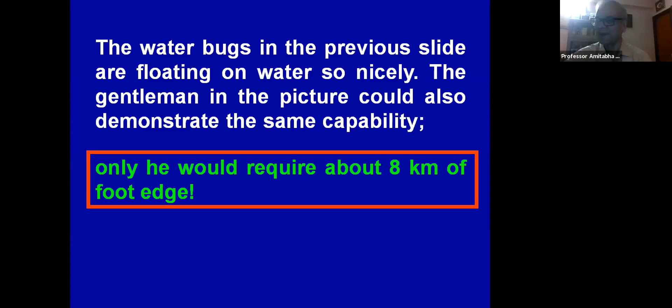Ultimately, you will find the deflection at the end is proportional to L square. So the deflection scales as L square. When size is large, deflection will be much larger. Therefore, smaller beams behave as much stiffer compared to large beams. Like you have seen a rod mounted on a truck going in front of your car, it just moves like a flexible object. Whereas the same shaft in a smaller size, like a gramophone pin, will be much stiffer.

The same thing Galileo noticed, that bigger things tend to deflect more. Like if you have a simply supported beam, he saw that keeping the proportion same, if you make it larger and larger, after some time the beam is going to break under its self-weight, though it looks the same and the proportions are the same.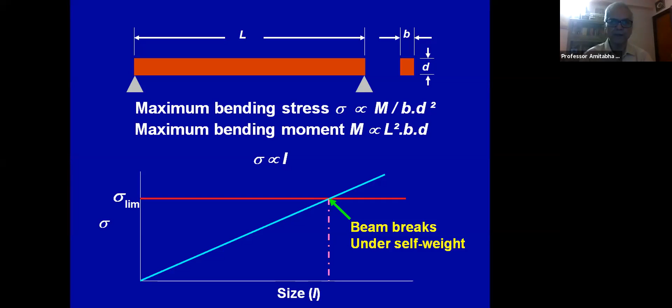Actuator design for large force development. I mentioned in the previous lecture that nature always uses the advantage of the scaling laws. Now I will give a very simple example to demonstrate the advantage of using the scaling laws as done by nature: how the choice of actuation system affects performance.

Now let V be the total volume provided for an actuator device, and let F be the total force developed by electromagnetic actuation. Suppose you fill it with an electric motor; the force it develops is F, and the volume of that motor is V. Now, if you reduce the actuator size by a factor n, the volume of each unit becomes V by n cube, because volume scales as L to the power 3, and the number of actuators that can be packed inside the same space is n cube.

If you reduce the size by 10, the volume of each unit will be 1000 times smaller. So you can pack 1000 units in the same volume provided for the actuator. Now each actuator develops a force F into N to the power minus 4. If you are using electrostatic, then it scales as L to the power 2. So if you have scaled it by n, each actuator is going to scale as n square.

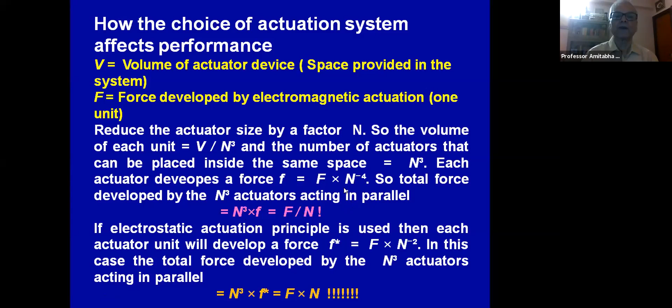Now you see what happens in nature. Nature always functions - all natural objects, yourself, including the participant's hand, we always function using electrostatic phenomena because of ion movement, not electromagnetic. And electrostatic force scales as L to the power 2, whereas inertia force, electromagnetic force, scales as L to the power 4, as I just shown.

Now, say electromagnetic force or the common actuator like motor or something develops force F. Now miniaturize it by a factor n. So the number of actuators you can pack inside is n to the power 3. And each

actuator will produce now not F, but it will be reduced by n square, because electrostatic phenomena scales as L to the power 2, not L to the power 4. So each one is producing F by n square force, and there are n to the power 3 number of actuators.

If they are massively parallel and functioning simultaneously, what will be the total force? Each one is producing F by n square, and there are n to the power 3. So F by n square into n to the power 3 equals F times n.

So if you have miniaturized this actuator by 1000 times, the total force it will be able to generate in the same volume of actuator, which is miniaturized and massively parallel, will be 1000 times that. That's why a crocodile can snap its jaw in a fraction of a second, producing a huge amount of force.

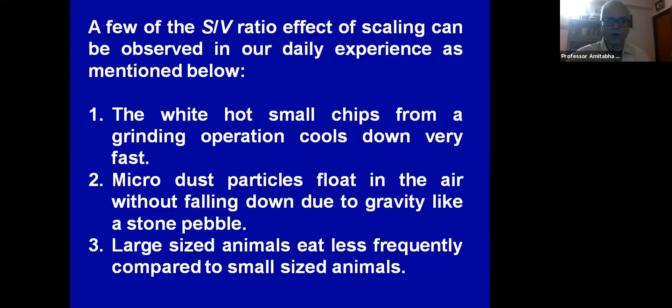And the surface area controls the frictional force provided by even a small flow of air. So the small flow of air will keep the friction force acting on the minute dust particles, keeping them floating, while its downward weight is disproportionately small. So the dust particles float. Again, as I just mentioned, large size animals eat less frequently, whereas small size animals have to eat very fast.

Metabolic rate and body mass, how they are proportional, that will be shown. As I will show you, it is a very interesting phenomenon, and that has revealed some fundamental thing. But before going to that, I'll show you how size versus number of species in our world, and the size, how they are related.

Now, how scaling helps to unravel some hidden secrets of complex systems, a very interesting example I'll show you. The heat generation rate in the body of a living entity is proportional to metabolic rate, and it must be lost through the body surface in order to maintain a stable body temperature.

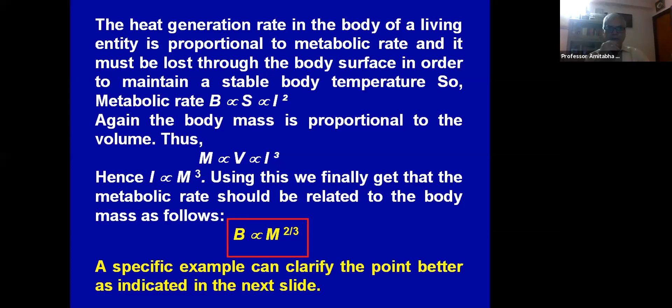Or B is equal to 6L square into H. Now L, as you can see, is nothing but M by rho to the power 1/3 from this. So therefore, here directly you get B is proportional to M to the power 2/3. So according to this scaling law, B and M should be related by this law.

But in reality, a very funny thing is found. Metabolic rate is not proportional to body mass to the power 2/3, but body mass to the power 3/4. Now, this was a mystery for a long time, and this used to be known as Kleiber's law.

You can see such a huge range of objects like mouse, small birds, guinea pig, pigeon, goose, dog, sheep, man, wild boar, horse, cow, elephant. If you plot their metabolic rate by body weight in log scale, you will find a straight line, and the slope is 3/4. It's almost a perfect scaling law, 3/4. Now, why is it so? It should be 2/3. Much later, and recently only, it has been found that this can be explained.

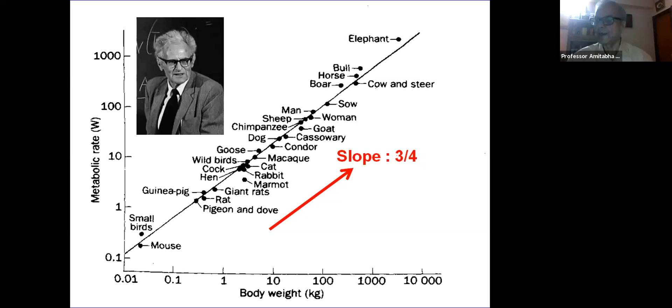You can see the same Kleiber's law: metabolic rate is proportional to mass to the power 3/4, not 2/3 as expected according to scaling. This has been found to be the case mainly because in all animals, the fluid circulation system in the body is fractal. And it has been proved that because of this fractal nature, body metabolic rate has to scale as mass to the power 3/4, as actually found.

Now there are some very fantastic scaling laws that govern the parameters of all living objects. The hidden reason behind that is still not very clear to scientists, but I am giving some examples. X is the particular parameter, M is the body mass, and this is the allometric law. Now this lambda is important for us. What is this allometric scaling?

Metabolic rate, as I've just shown, has lambda equal to 3/4. Lifespan is 1/4. Growth rate is minus 1/4. Heartbeat rate is minus 1/4. Length of aorta or height of trees, lambda is 1/4, etc. So you can see, all major things connected to our life, they are multiples of 1/4.

Why it is so, nobody knows. Only metabolic rate somehow has been fixed, but why heartbeat rate is mass to the power minus 1 by 4? Now you see, lifespan is mass to the power 1 by 4, and heartbeat rate is mass to the power minus 1 by 4. What does it indicate? Total number of heartbeats is independent of body mass. That means the total number of heartbeats of an elephant and total number of heartbeats of a mouse will be the same in their lifetime. Very important.

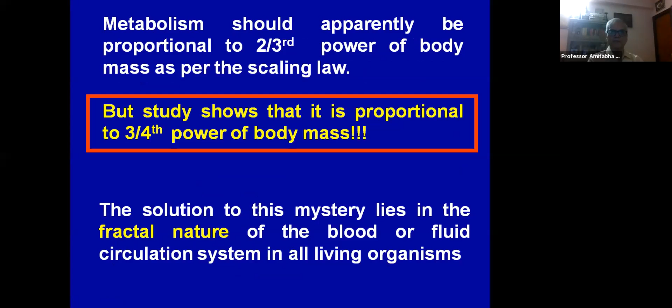Now metabolism should be, as I mentioned, but study shows the proportionality is 3/4 law, and this is because of the fractal nature of the blood or fluid circulation system. This fractal nature has been discovered recently, and that's why you can see these scaling laws reveal secrets of some complex systems.

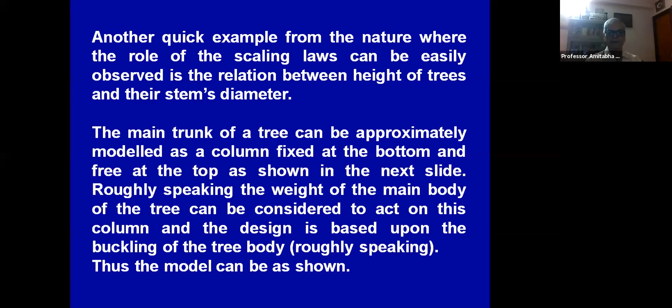Now another quick example from nature where the role of scaling laws can be easily observed is the relation between height of trees and their stem's diameter. If you take a tree and look at the diameter of the trunk, how are they related? The main trunk of a tree can be approximately modeled as a column fixed at the bottom and free at the top, as shown in the next slide. Roughly speaking, the weight of the main body of the tree can be considered to act on this column, and the design is based upon the buckling of the tree body. Thus, the model can be as shown. This is the model of a tree.

So this is the weight acting, this is the height of the tree, this is the diameter of the tree. Now the buckling load for such a column with the bottom fixed and top free, subjected to a load, is given by this standard formula from strength of materials. Considering the column to be cylindrical, the moment of inertia of the cross-sectional area is I equals pi r to the power 4 over 4. The mass of the tree M can be approximated as the mass of the representative column, pi r squared into rho into L, where rho is the density. And the load P acting at the top can be approximated as P equals M into G, so pi r squared, the area of the trunk, into rho into L into G.

So in the limiting situation, this can be taken as equal to the buckling load. Thus, equating P with the buckling load PB, one gets L to the power 3 is proportional to R to the power 2, or the radius of the tree trunk is proportional to L to the power 3 by 2. That means it increases disproportionately with the height of the trees.

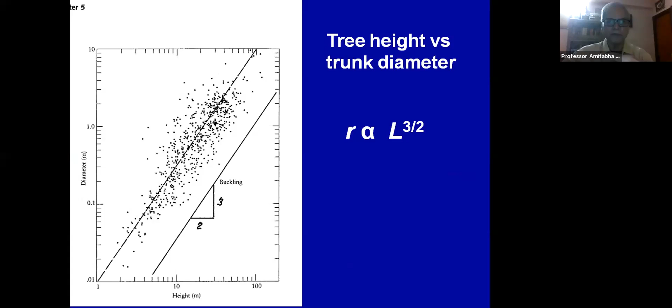So let us see in nature how tree trunks and tree heights are related - tree height versus trunk diameter. You can see there is some scatter obviously, but by and large it follows a scaling law, and this scaling law fits the derived relation from this approximate analysis, R proportional to L to the power 3 by 2. So therefore, a taller tree will have a disproportionately thicker trunk, whereas a small sapling will have a very thin and slender stem, as you can see from this.

Now, if you plot the frequency of occurrence of an earthquake of a particular magnitude, it fits a particular scaling law, a wonderful scaling law. And still nobody knows how such a simple scaling law arises for such an extremely complex phenomenon. It is expected that future study of such complex natural phenomena can give us many important insights. I think we have to find out the invariance of such phenomena, as I mentioned at the very beginning, and scaling laws actually lead to that.

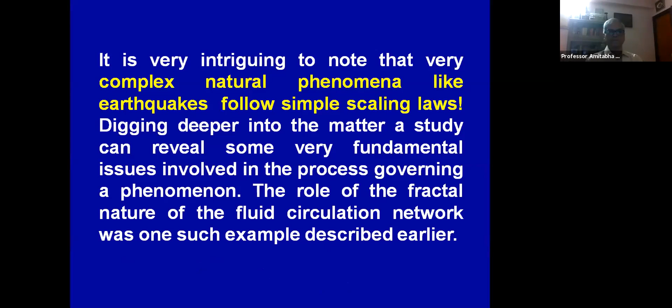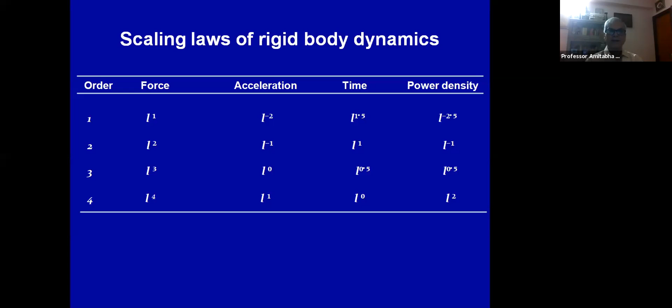So while designing miniaturized devices, one of the most important parameters that needs to be given importance is the power density. Many miniaturized electronic devices have been found to fail mainly because of poor design, where the power density was too high.

I will give another example before ending: flying of objects. Flying of objects also obeys nice scaling laws. The basic thing is that lift must be equal to the weight so that it can be sustained in air. Lift depends on both speed and wing area: it depends on the square of the speed and is proportional to the wing area. And weight depends on the total mass.

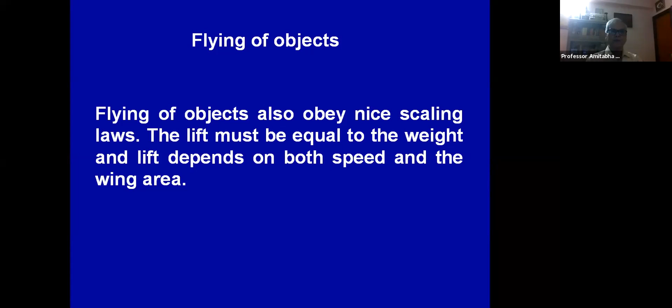So, if W is the weight, A is the area of the wing, V is the speed, and L is the lift, then lift and weight must be equal. The area, which is the predominant area, scales as L to the power 2, and weight scales as volume, which scales as L to the power 3. Hence, A to the power 3 is proportional to L to the power 6, because area scales as L squared and volume scales as L cubed.

So if you cube the area, it will be proportional to L to the power 6, which is proportional to W squared. So W is equal to L, and lift is given by some constant times the lift coefficient times the total wing area times V squared. If you cube this, it becomes another constant times W squared, because A cubed is some constant times W squared.

Now if you combine the two, you find straightforwardly that V to the power 6, with some constant, is equal to the mass or total weight, M. So here the scaling law relates the mass of the flying object and its cruising speed. It follows that V should be proportional to M to the power 1 by 6.

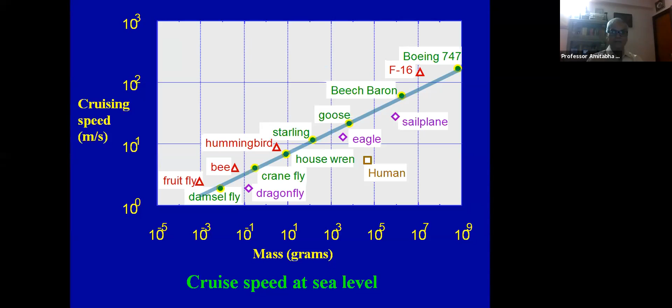Now, I think quite often the directors of science fiction movies make gross mistakes by not taking care of the scaling law. Many of you might have seen the movie Honey, I Shrunk the Kids. The kids are made very small, minute, by some science fictional method, and the whole story is about it.

But there used to be another movie released in '66, which a majority of you may not have seen, but I saw it, and that was called Fantastic Voyage. This was a science fiction movie in which a team of doctors were miniaturized and injected into the vein of a patient for removing a blood clot at an inaccessible location in the brain.

The story was that a very famous scientist was visiting a country and met with an accident in a car, and inside his brain there was a blood clot and he was in coma. And it was absolutely necessary to save the famous scientist. So what they did was they shrunk a submarine along with some people, the doctor with a laser gun, and they were injected inside the vein, and the whole thing went through the heart.

It's a big long story. There was a villain also, there was a heroine also. They went to the location on the brain, which was inaccessible from outside. And with the laser gun, the blood clot was melted, and then they came out and the scientist was saved.